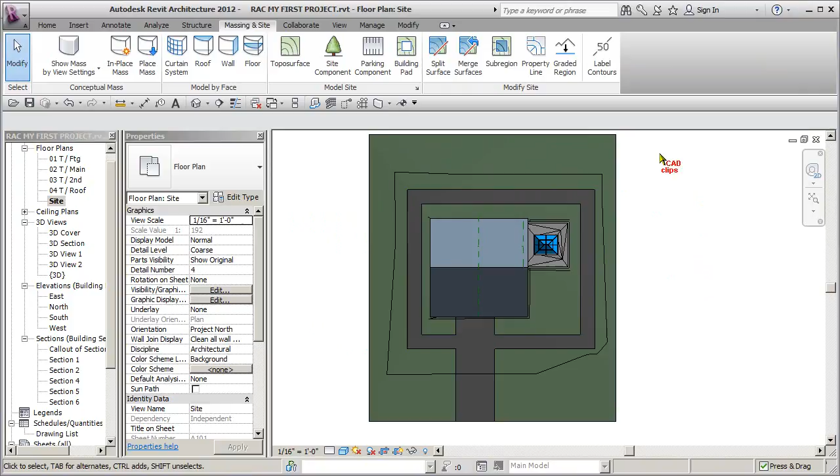All right, we're ready to create our curb wall. I should also point out that with this sub-region, what happens here is if I actually pick this topo surface, so I keep picking the crop region, if I pick the main topo surface and I say edit surface and I add points in here and I change the terrain by adding points around here, okay, escape, escape, or even if I pick a point, let me just pick modify here. If I pick a point and change the elevation, okay, it's going to change and include this object.

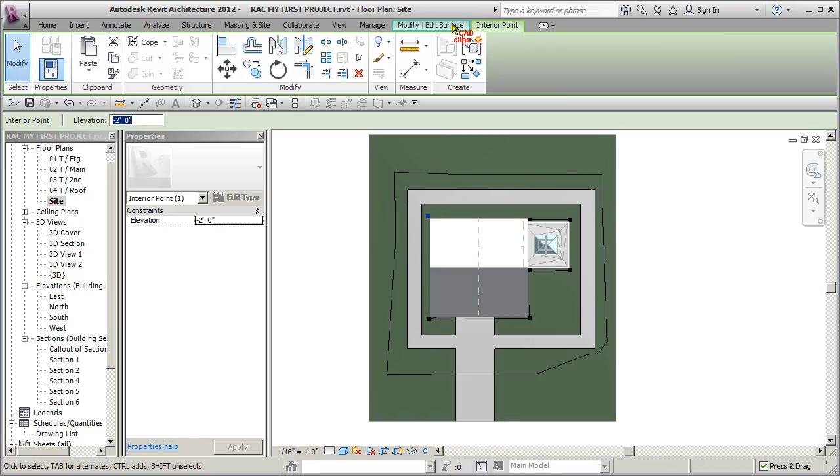This object will still follow the contours of the main topo surface, okay, because it's a sub-region. Okay, I'm just going to cancel out of this by picking back on here and canceling out. If you create a split surface, you can do the same thing, but then it becomes an independent object. If I add a berm or something running through here, this sub-region will go up and down and follow that contour because it is a sub-region.

Okay, so now let's create a new wall type. Now the other thing is I also want to know when I place it the height of it, but for now what we want to do is just create a new wall type. Okay, so we can actually go right down to here to families, go down to walls, and see what we have. We don't have to start the wall command to get a wall. We can just click on here.

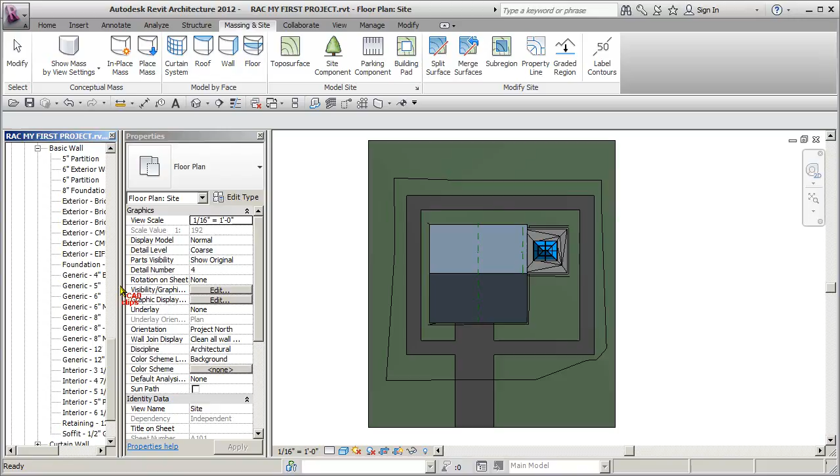There's basic walls, curtain walls, and stacked walls. Most of the walls we use are basic walls. We did use a curtain wall. And inside of here, there's all our wall types. So when we go up here and pick our wall tool by picking wall, these are our options. So let's just have a look here before the fact and say, well, we want about an 8-inch concrete wall. So let's just take this generic 8-inch.

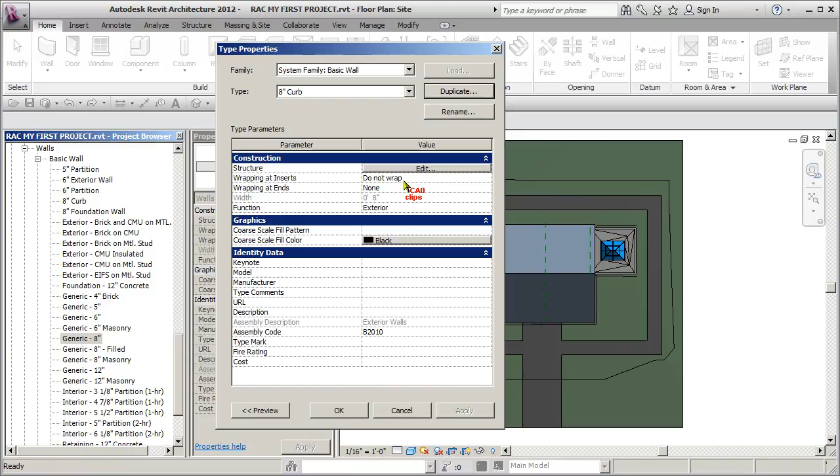I'm going to double click on it and it opens up my type properties. I'm going to go straight in here and duplicate and call this 8-inch curb. Okay. Now, the properties in here don't define the top and bottom of the wall. This defines the wall width, the material, etc. We set the top and bottom as instance parameters. These are type parameters. So let's look at the structure. It's 8 inches, which is good.

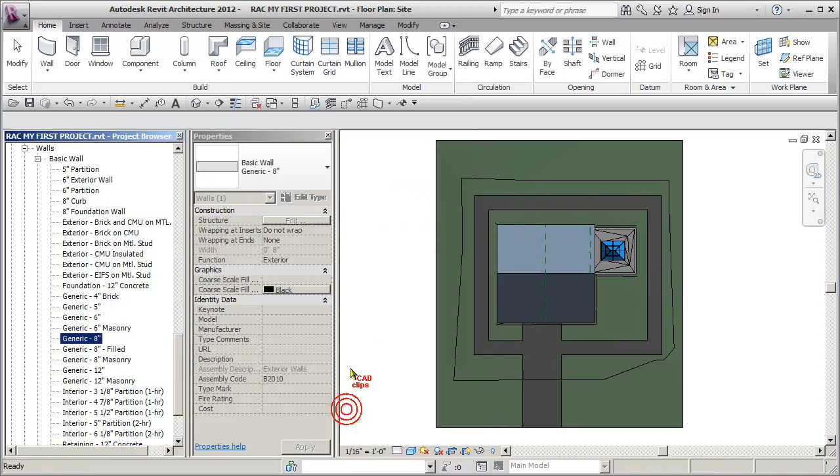We're going to go in here and pick our material. We're going to go in materials and we're going to say cast in place concrete. Perfect. Hit OK. That's done. So we're going to get the effect on here. Okay, 8 inches is good. Hit OK. Hit OK. That's it. We now have an 8-inch curb wall.

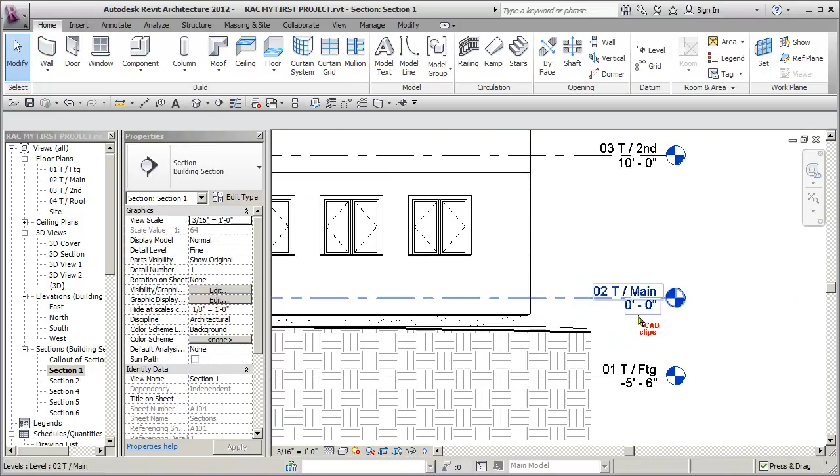Now, let's go over to here and let's check our heights for our instance properties. Okay, we don't need this anymore. Let's go back to our sections. Let's pick any section in here. Section 1. Okay, so think about it. There's our grade. There's top of main at 0. So we want our curb to be about around here somewhere. So we want it to go from top of main minus 4 feet at the bottom to top of main minus 18 inches. Okay, we'll just try that out.

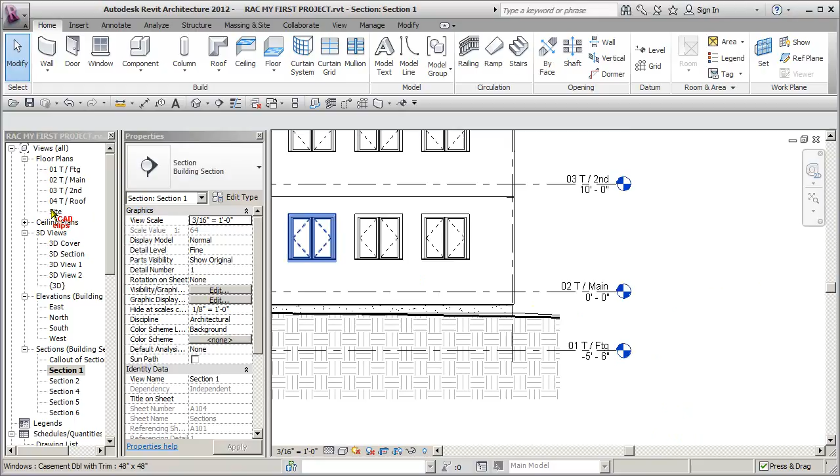So watch. Let's go to our site plan. We'll start our wall tool. Wall. Go pick our 8-inch curb off of here. There it is. Okay, now here we go. Top of main minus, let's go minus 3'6". Okay, unconnected height of, well, maybe we'll just go unconnected height. No, I want to connect it to the top of my main floor. So I'm going to go up to the main floor minus 18 inches, which means it's basically a 2-foot wall. It's doing the math for me.

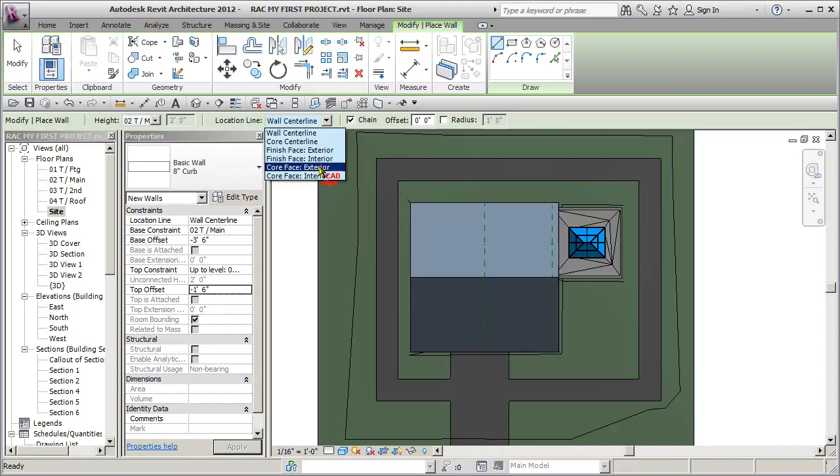Okay, good. So now what I'm going to do is I'm going to say, well, let's set it to be not the wall center line. Let's go to finish face exterior. There's only one material, and so finish face exterior is really the same as core face. Let's go core face exterior. And now let's just draw a line, and we can't snap to this here. So I think I'm going to go back and switch this to be centered, wall center line.

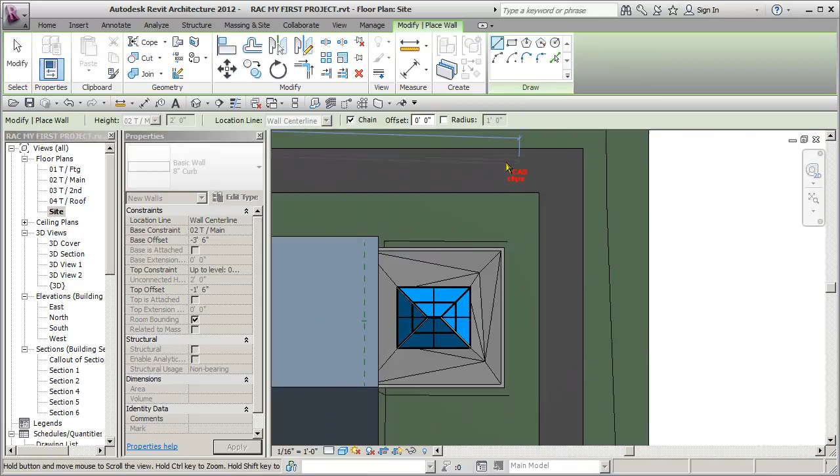And then I'm going to just draw right on top of this. I don't have to worry too much about it. So I'm going to go around and trace. Now I'm going to do them all. And if it's the wrong height, I can go back and change them all at the same time. Okay? So I'm just basically tracing around my curb here.

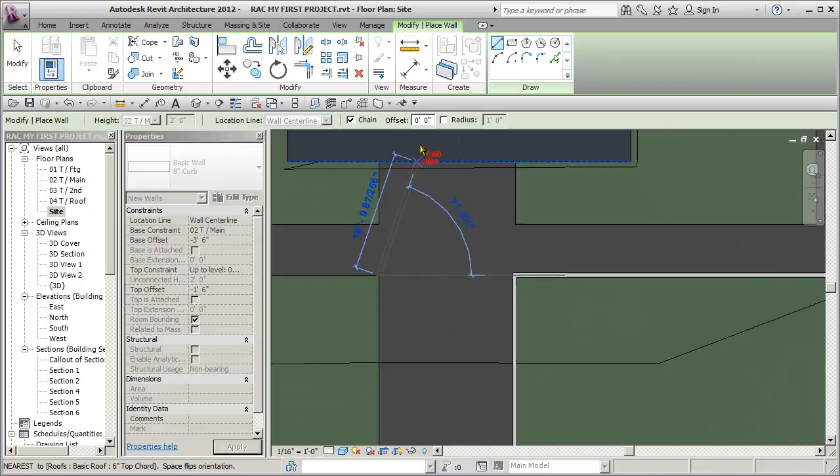That's all I'm doing. Okay, now escape, continue. I've got my chain turned on, which is why I can go from end to end here. And of course, they're just walls, so they're going to fillet and trim with each other. Okay. Can I offset them? Let's try it. Let's go offset 8 feet.

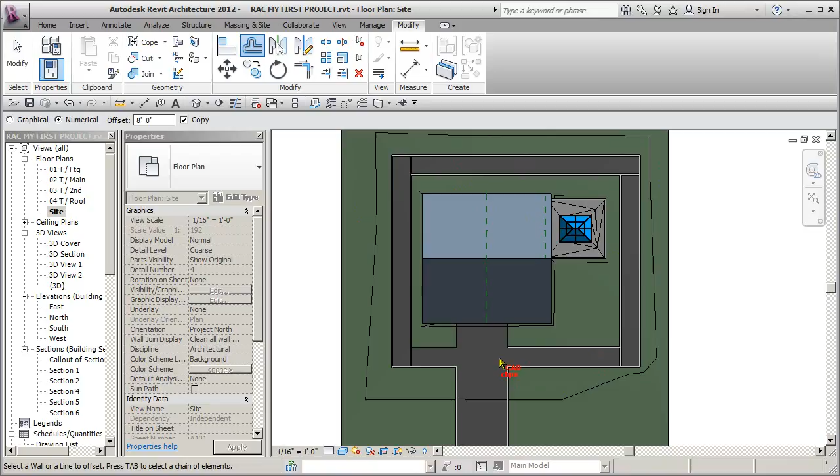Other side, do it. Watch which side your mouse is on here. You have to be careful. It might offset to the wrong side. Okay. Good. Trim, fillet. Okay. Looking good. The site stuff is fun, and it really kind of fills out really quickly.

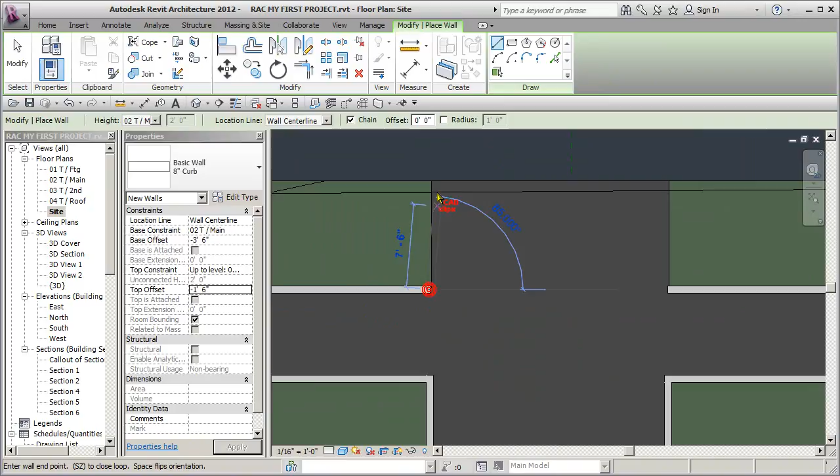Okay. Let's draw another one. Pick on here and say create similar. Give me one of these. I don't know what it is or what the heights are. Oh, now as I'm drawing this, let's do this. I don't know where that main floor is. Can we switch to wireframe? There we go. Switch to wireframe, and that way I can pull it right up to there.

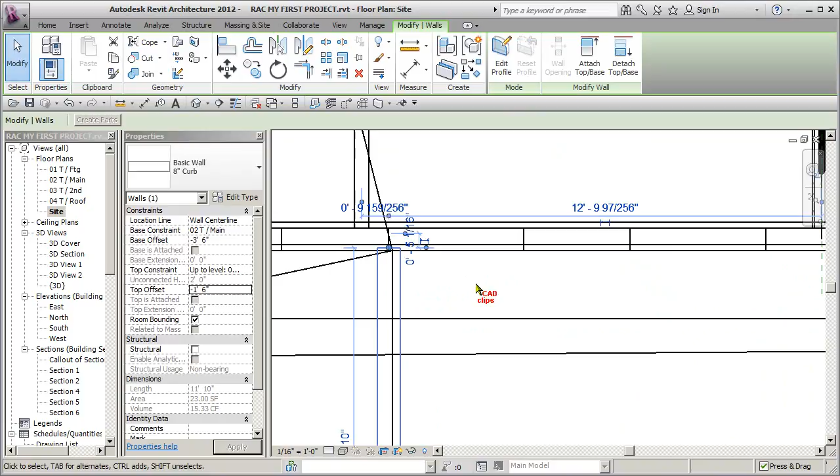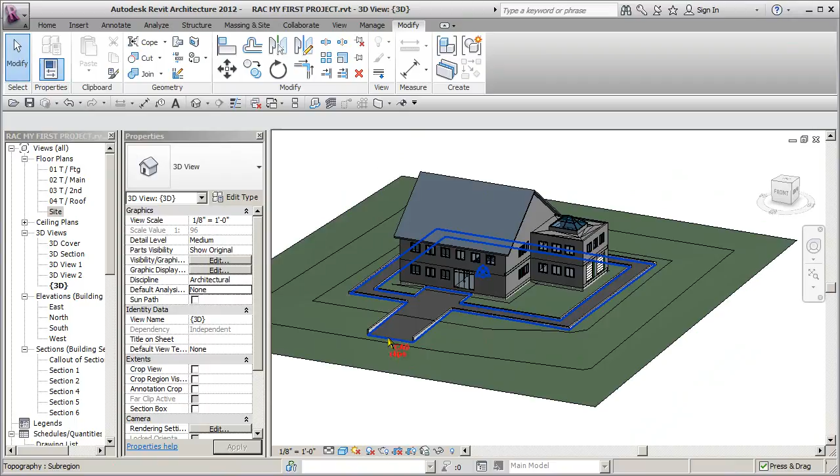Escape, escape. Pick on this wall. Pull it up. Oh, too far. There we go. Back to hidden line. Or shaded. Sure. Okay. There's my curbs. Okay, let's go to my default 3D view. Not too bad. Okay. We might have to stretch this out a little bit because I'm pretty sure my angle is going to be, you might see that. So let's go to my site plan again.

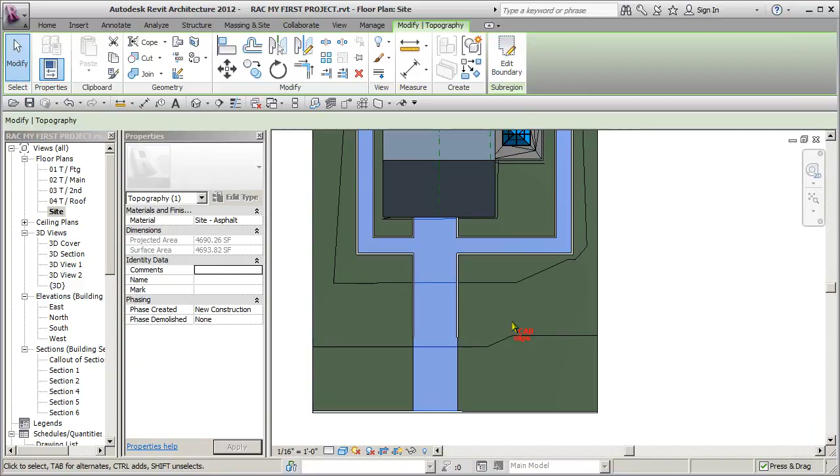Okay. I've got to take my crop region here and make this a little bit bigger because my camera angle is going to be here and I'm going to catch this. So I'm going to go in here and say edit the boundary of this, and I'm going to pull it down there. Finish. Now I'm going to grab this wall. Okay. Escape, escape, hover, pick, grip it, use your shift key to keep it nice and straight. Use your tab button if you have to grab the wall, drag it down.

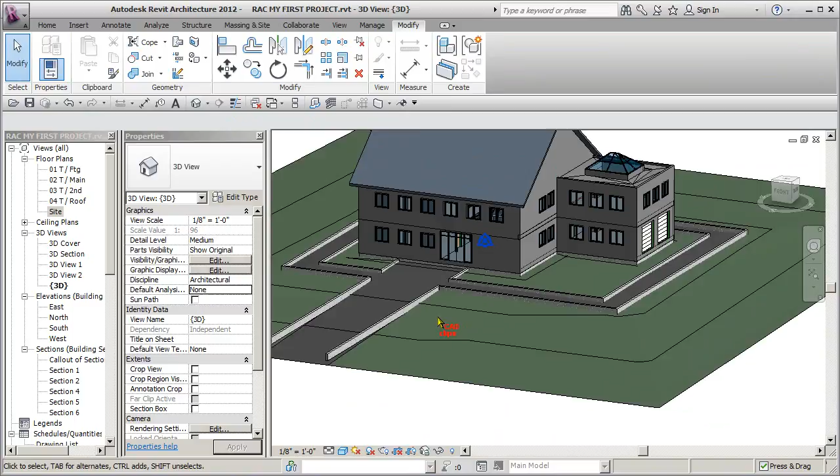There we go. Now I can take this crop region and pull it back now. I don't need to see all of that. But the fact is, in the true 3D view, I'm going to put my reflection pond here. So if I go to my site plan, in fact, to create the camera view I'm going to really want, I'm going to need to be way back here to catch all of that.

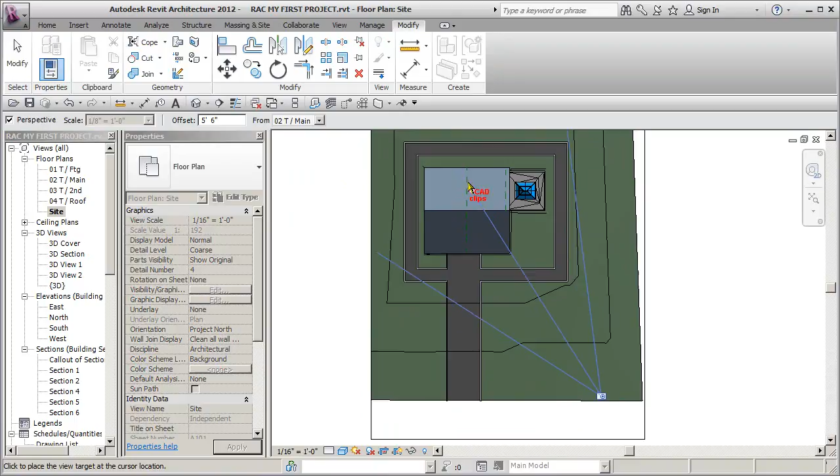Let's try one. 3D view, camera. Let's say I want to be about right here because that reflection pond is going to be right in there. Okay, want to go way back because we're going to have trees behind there and everything. Click. There we go. See, now I can pull this up. Okay, SD on the keyboard. Okay, there's my curb. Curb looks a little high. Okay, so that's not a problem. There's going to be our reflection pond, and we'll be able to kind of trim this up and render it.

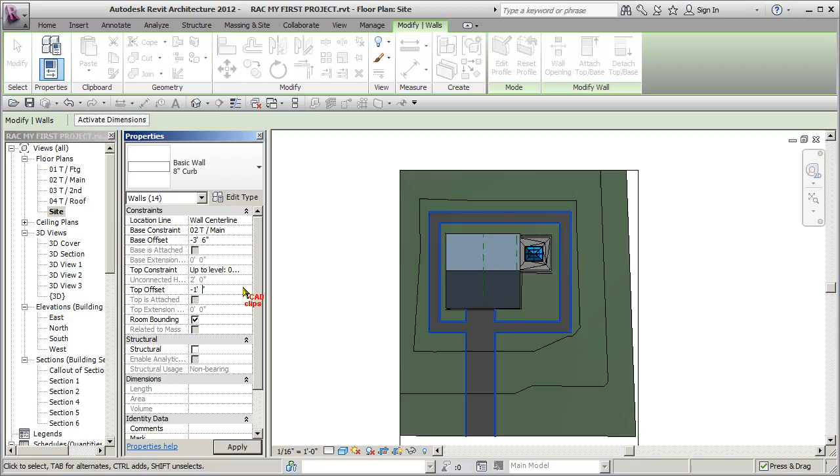So let's go back to our site plan. And watch what I'm going to do. I'm going to hover, tab, click. That grabs all of those. Now I'm going to hover over this one, tab, and then control click. There we go. There's all my walls. And the problem is they're coming up too high. So I'm going to say top offset is -1 foot, another 4 inches down, so 1 foot 10. Let's go almost -2 feet. Let's try that. Okay, hit apply.

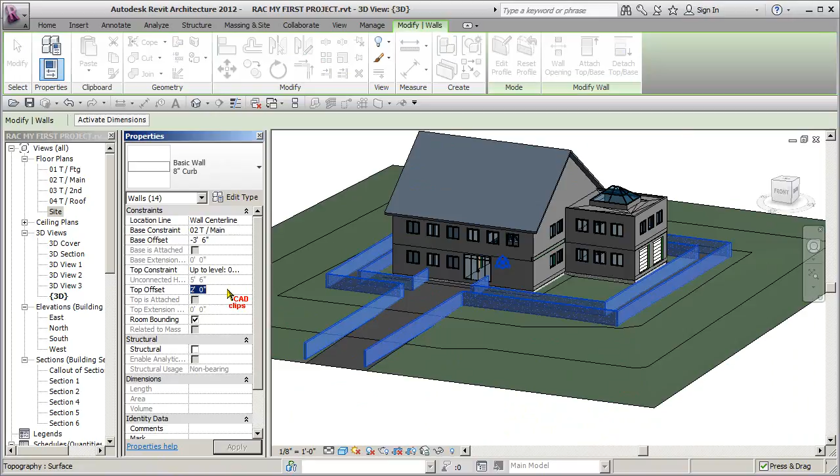Okay, now let's go to my 3D view, and my curb has gotten a little bit lower. Okay, hover, tab, click, hover, tab, control, click. Let's try it again. Sorry, that didn't do anything. -2 feet. Minus. There we go. That looks better. And you can see that this is not following that because these walls are straight.

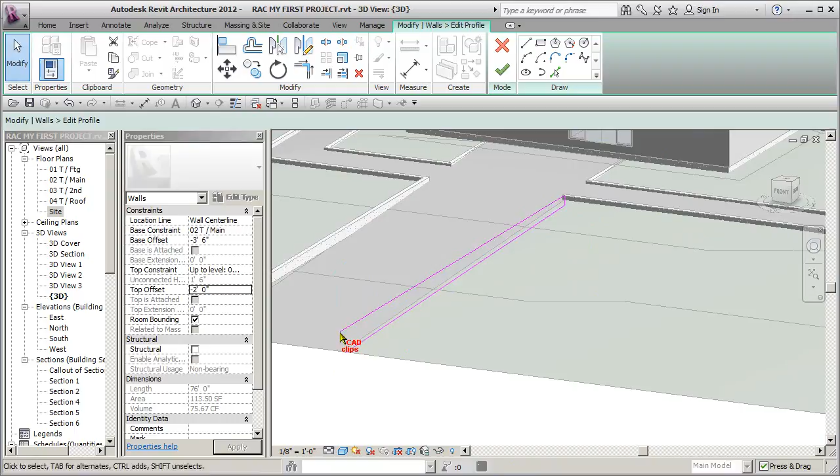Okay, click out. If I wanted to follow that, I could go in here and say edit profile, and then I could take this and change this to come down here, something like that. Delete this, offset this by maybe 4 feet. Too much. 1 foot 6. There we go. Escape, escape. Do my trim.

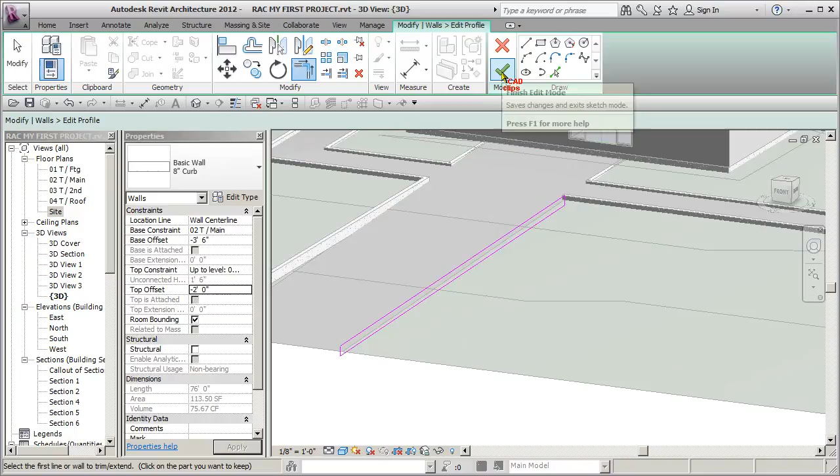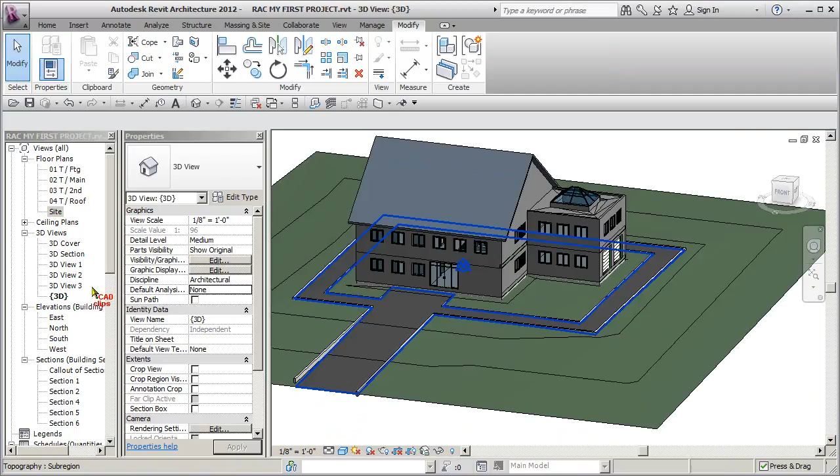Editing the profile of that is basically what I'm doing, and that's good. So I could have that follow that grade by editing the profile. So there is my curb going around, and it's got concrete material. If you don't like that height, you can go in and change it again by just selecting them and then play with these properties. All right, let's have a look at our 3D camera view we created. Not too bad.